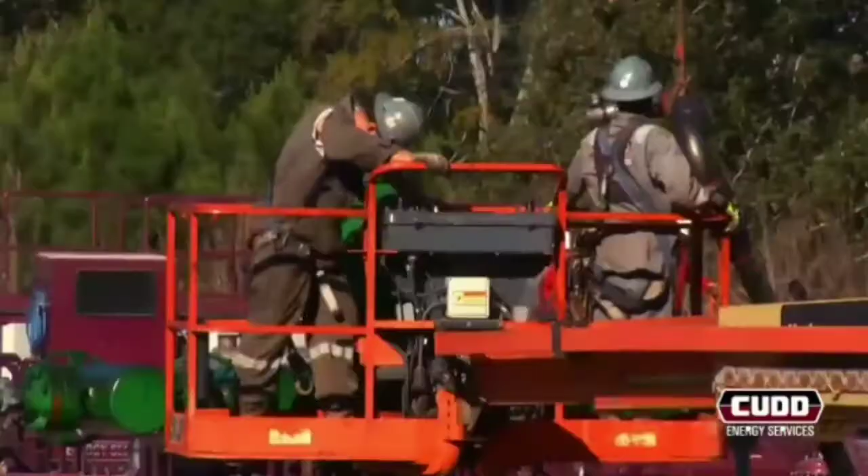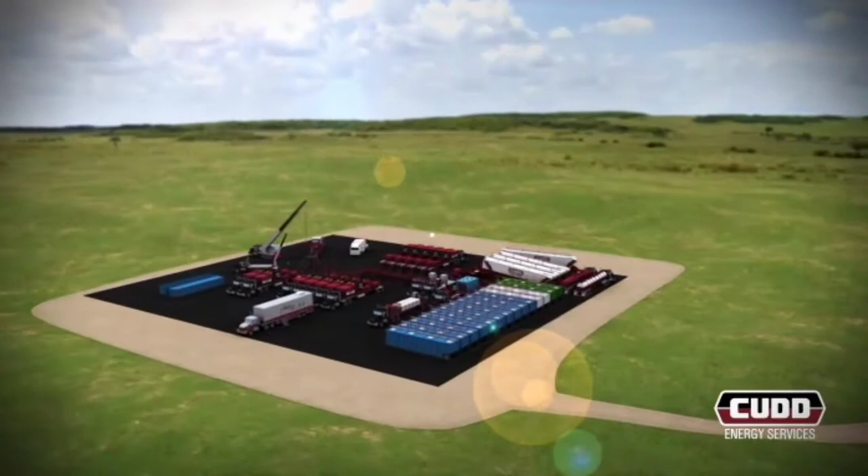CUDD Energy Services provides a broad range of specialized oil field completion services to energy companies engaged in the exploration and production of oil and natural gas. On today's well sites, we provide experienced personnel combined with engineered solutions to deliver an efficient completion solution.

CUDD Energy Services provides today's most modern equipment in order to prepare the well for the hydraulic fracturing process. Our fracturing equipment is engineered to the industry's highest standards with safety and reliability at the heart of the design. Our engineers evaluate existing well conditions to formulate an efficient and proven well plan for the customer.

Prior to any equipment arriving on location, CUDD's field representative performs a detailed site evaluation. Containment barriers and berms are constructed to preserve and protect the environment. This assessment ensures the safe and optimal setup of the water storage, proppant storage, coiled tubing, wireline, and pressure pumping equipment used for the completion process.

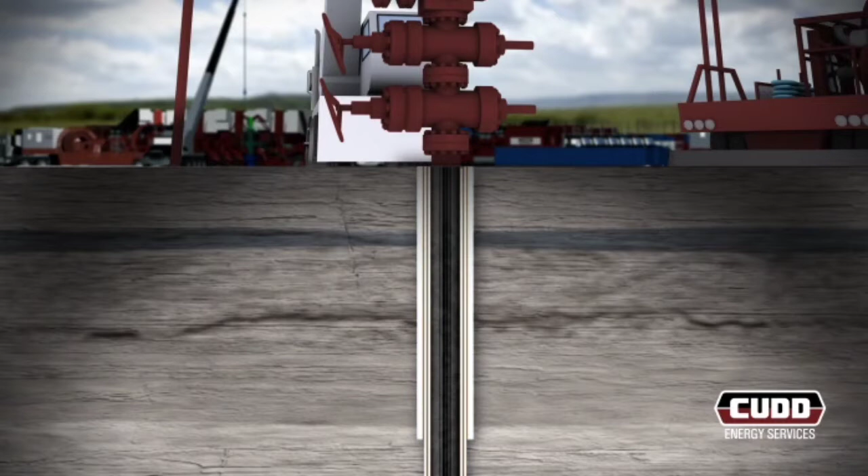After the well has been drilled, cased, and cemented, the completion phase begins. Hydraulic fracturing is an essential part of successful production in today's unconventional shale formations. This process will create a network of fractures in the zone of interest, providing channels for hydrocarbons to flow into the wellbore. The initial phase involves prepping the wellbore for perforation and stimulation of the toe stage.

CUDD's coiled tubing division utilizes Thru Tubing Solutions' exclusive abrasive perforator, minimizing tortuosity and injection pressure during the hydraulic fracturing operation. The perforating bottom hole assembly is lowered by the coiled tubing to a predetermined depth.

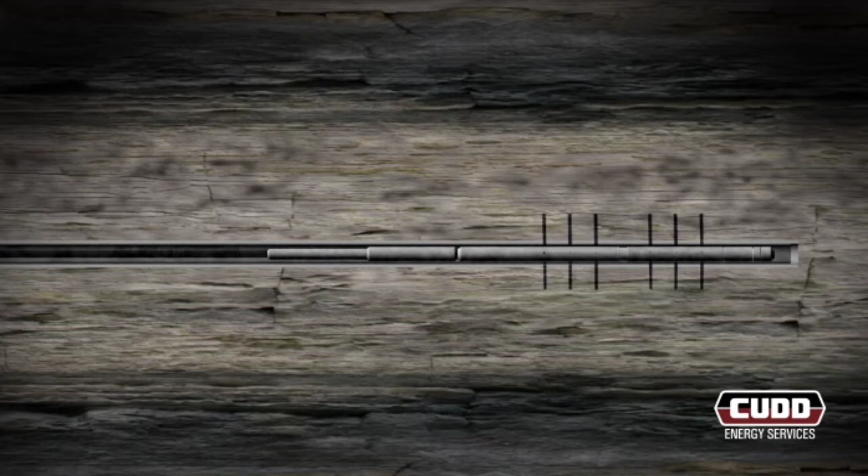At this point, the interval is perforated utilizing a high-pressure water and sand mixture, creating communication between the production casing and the formation. After the initial perforation is complete, the coiled tubing and bottom hole assembly are pulled out of the wellbore, and now the toe stage is ready to be fractured.

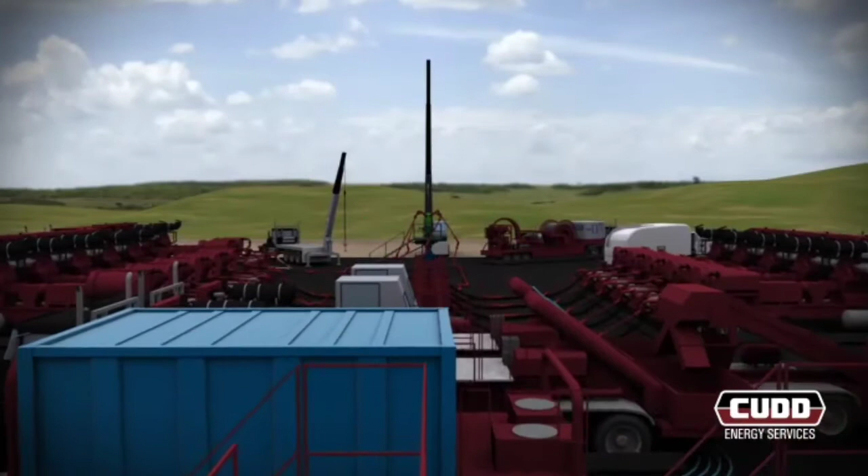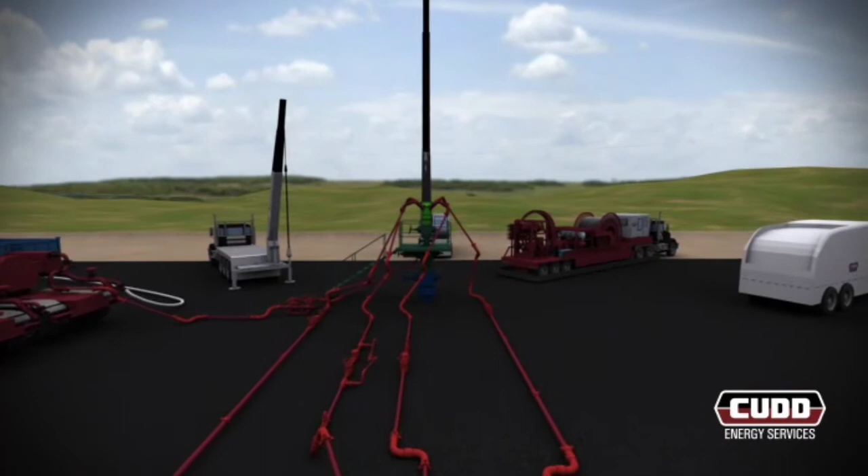The coiled tubing unit is then rigged down, and the hydraulic fracturing equipment and crew are positioned to begin operations. CUDD Energy Services' hydraulic fracturing fleet consists of the industry's most modern high-pressure pumps and computerized blending equipment. Our 2,250 horsepower hydraulic pumps are rated at 15,000 pounds per square inch.

CUDD's blender, hydration unit, and liquid additive system deliver a consistent fluid throughout a multi-stage pumping operation. Water is drawn from the storage tanks into the hydration unit, where it is mixed with the gel and sent to the blender. Simultaneously, proppant is transferred to the blender from the proppant storage on a dual belt conveyor, while the liquid additive system delivers precise amounts of chemicals to the blender.

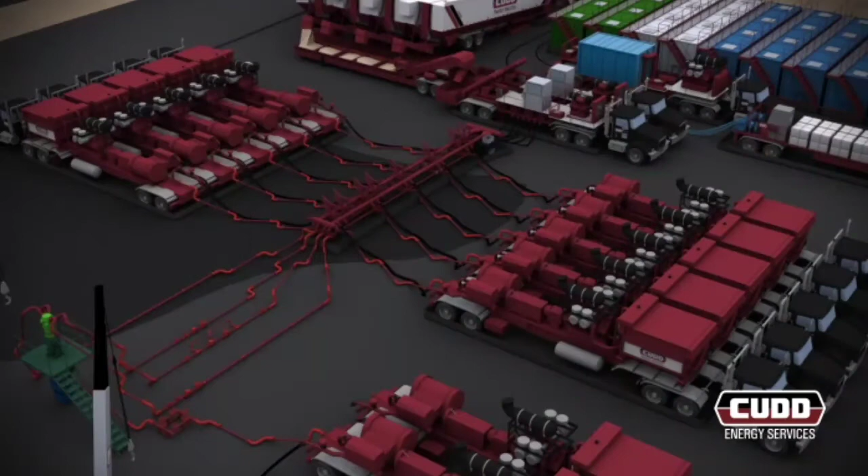The entire slurried fluid system is blended in the tub and sent to the high-pressure pumps through the low-pressure side of the manifold. The pumps increase the fluid pressure and then send it through the high-pressure side of the manifold to the wellhead. The entire fracturing process is supervised and controlled from the computerized data acquisition van.

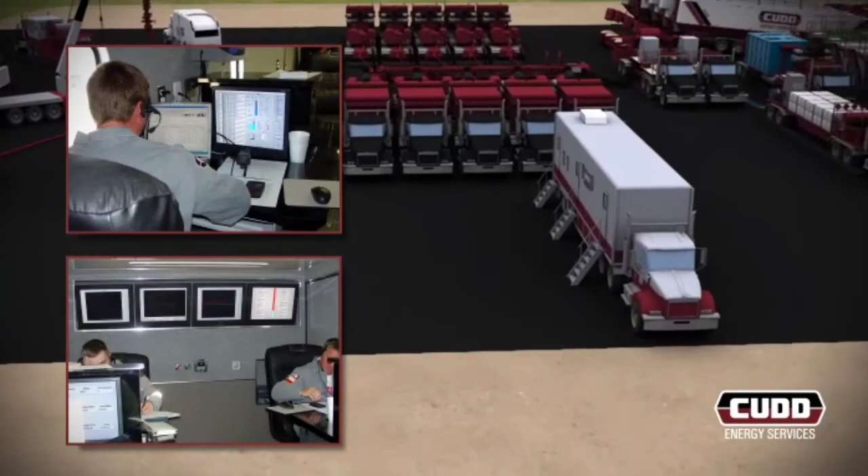CUDD engineers and supervisors observe reservoir behavior during the treatment using the industry's latest treating software. Personnel closely monitor the bottom hole treating pressure response and how it compares with the pre-job engineering design.

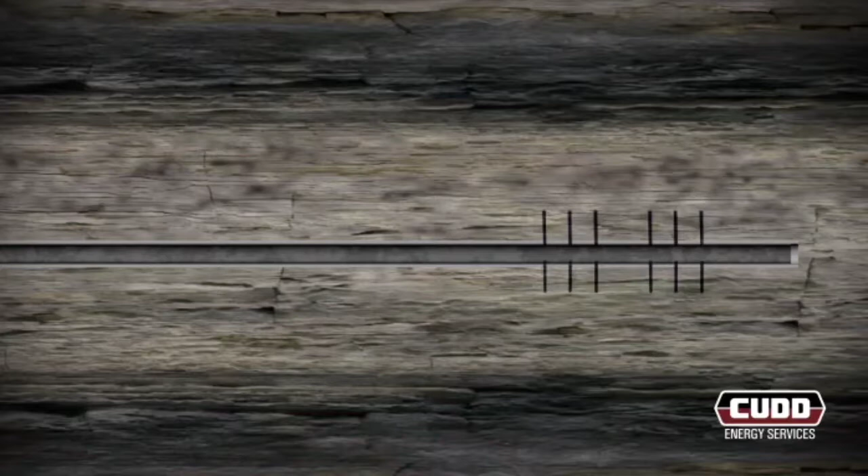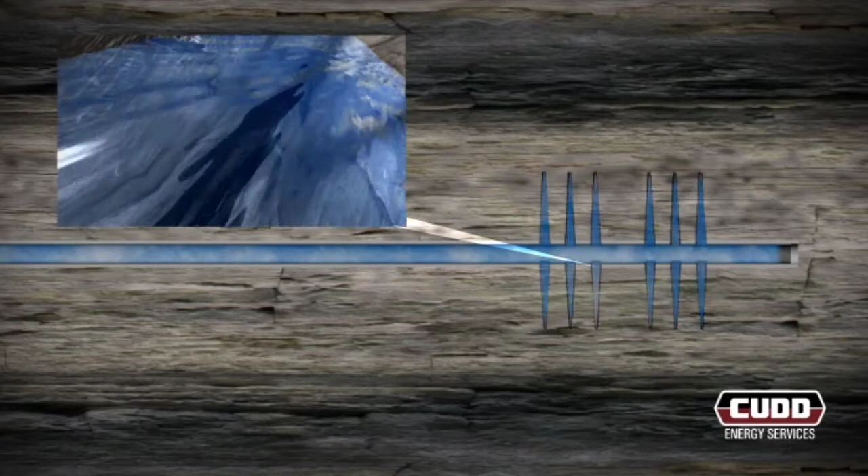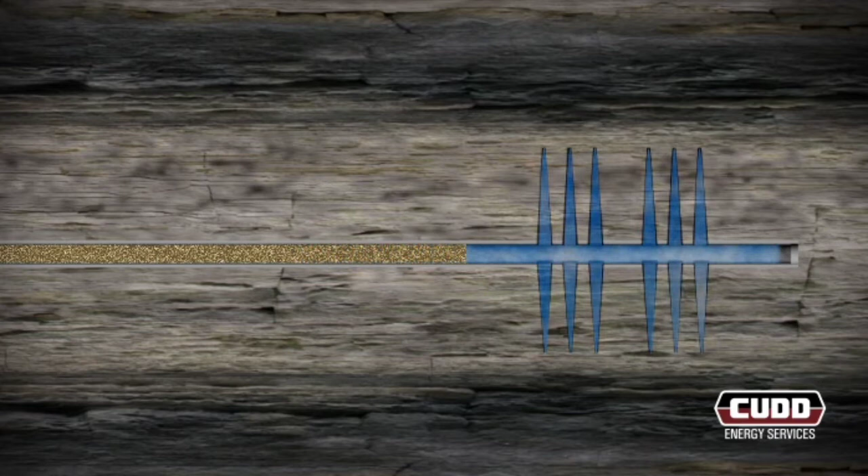The initial fluid, known as the pad, is void of any proppant and enters the formation through the perforations. This high-pressure fluid increases the perforation length and creates, elongates, and enlarges fractures along the natural channels of weakness in the formation. Then, proppant is added to the fluid and the slurry is pumped throughout the newly created fracture network.

The proppant holds the created fractures open and provides flow channels that allow hydrocarbons to flow into the production casing and then up to the surface. All fluid additives and proppant are closely monitored to ensure the volumes pumped are within design standards.

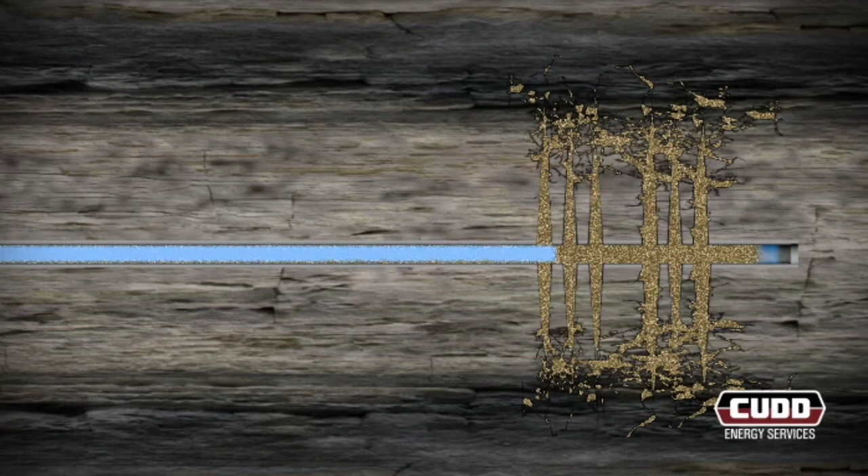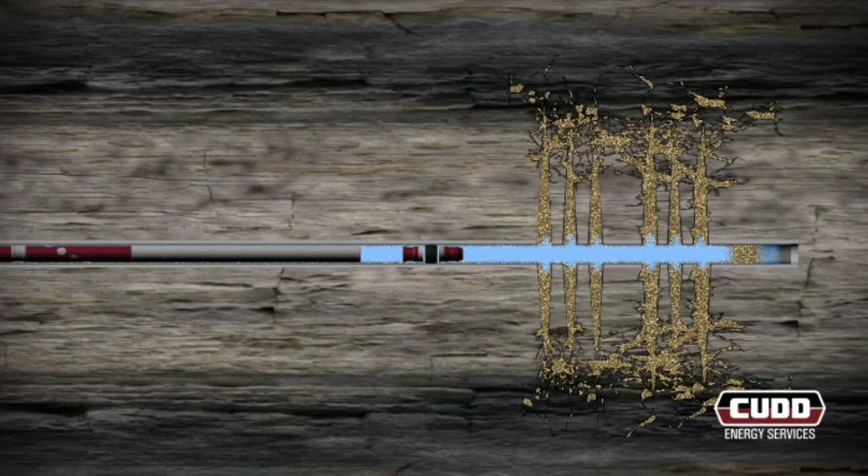Once the proppant slurry stage is completed, the well is then flushed with a predetermined volume of proppant-free fluid. This completes the fracturing process for the toe stage. Additional stages are completed by pumping down a perf and plug bottom hole assembly. This assembly consists of a composite isolation plug and perforating guns run on CES's electric line unit.

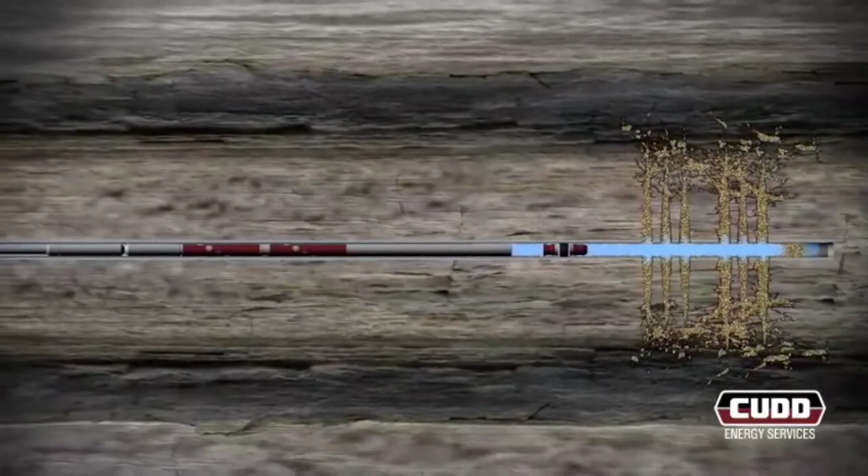The composite bridge plug is set in order to isolate the prior fractured interval and proceed with treatment of the next zone. This subsequent interval is then fractured, employing the same process as in the initial stage. The casing is perforated.

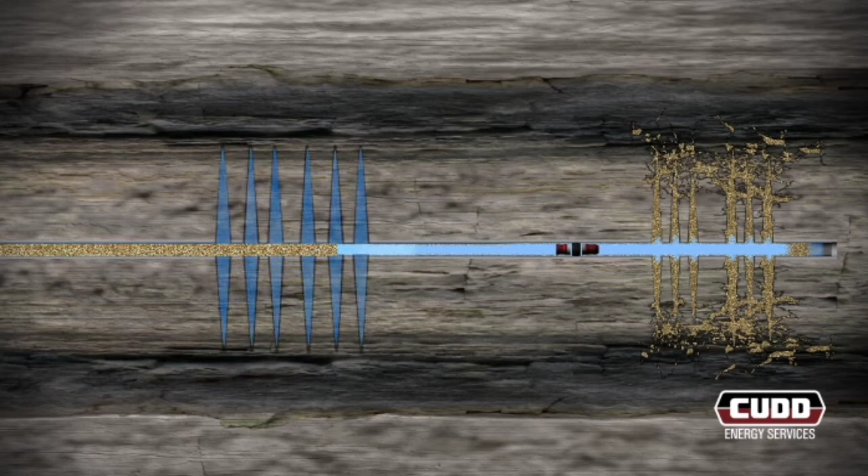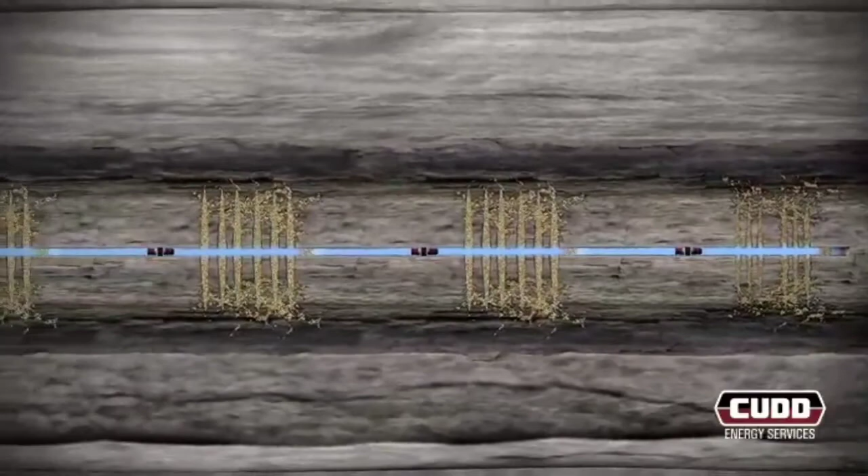The pad expands the network of fractures. Proppant is placed to hold the fractures open. The wellbore is flushed, and the new interval is isolated. This process is repeated for each interval until all stages are completed. Currently, typical horizontal shale completions consist of approximately 10 to 20 stages, with technological advances constantly increasing that number.

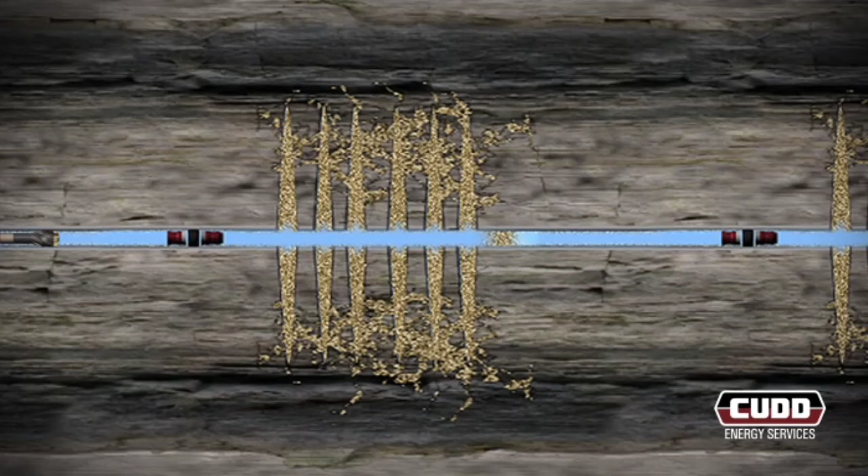Once the fracturing phase is completed, the isolation plugs are milled out and the wellbore is circulated clean, utilizing CUDD's coiled tubing or hydraulic workover services. The well is now ready to turn over to production.